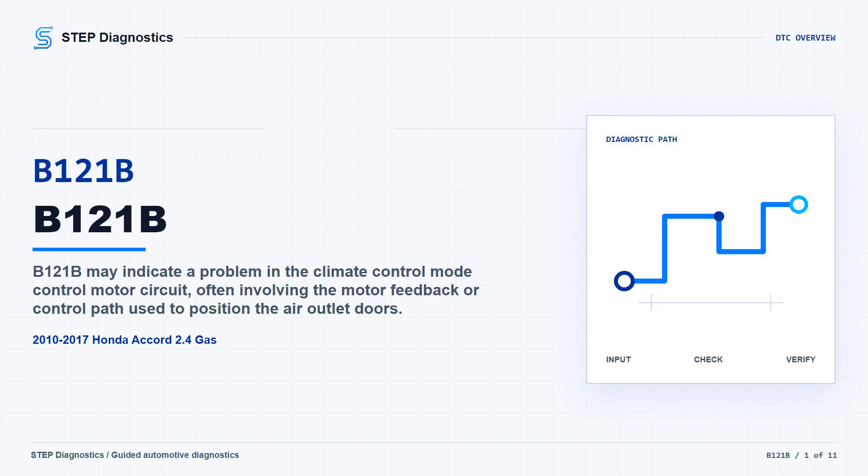On this accord, B121B points to a short in the mode control motor circuit for the climate control system. In plain terms, the control unit may not be able to trust or drive the door position feedback correctly, so the air outlet mode can act up, move inconsistently, or fail to respond the way the driver expects. The possible fault areas are the mode control motor, the wiring between the motor and the climate control unit, connector condition, or the climate control unit itself.

If other short circuit codes are present at the same time, check what they mean first, because the shared 5V circuit may have an open or a short to body ground.

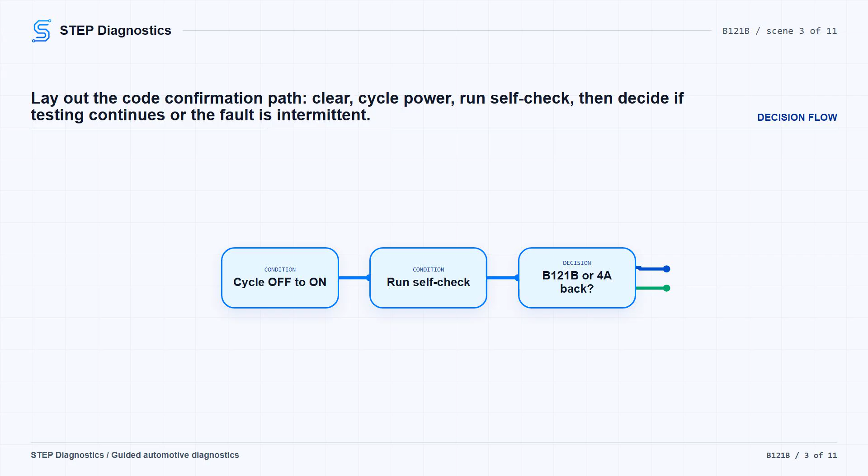Start by confirming the fault. Clear the codes with the HDS. Turn the ignition switch to lock 0 and then back to on, Roman 2, or on push-button start vehicles. Select OFF mode and then on mode. Run the self-diagnostic with the HDS or with the climate control unit, then check for codes again. If B121B or 4A comes right back, continue into the circuit checks. If it does not return, treat it as an intermittent failure and inspect for loose wires or poor connections in the mode control motor circuit.

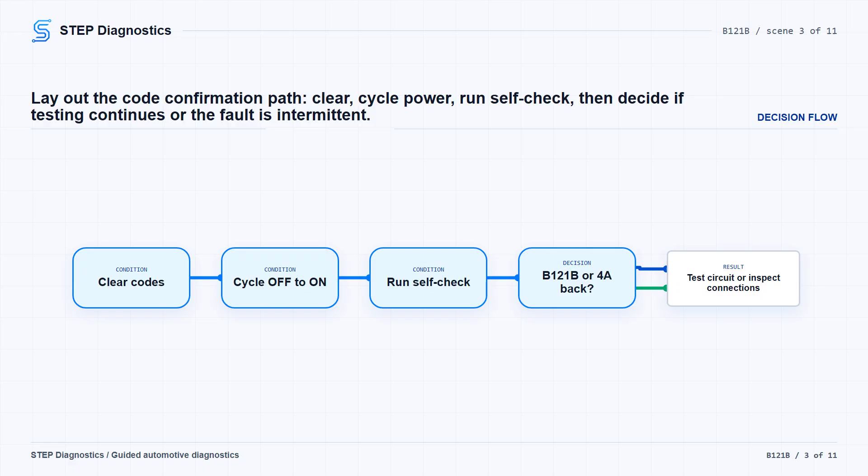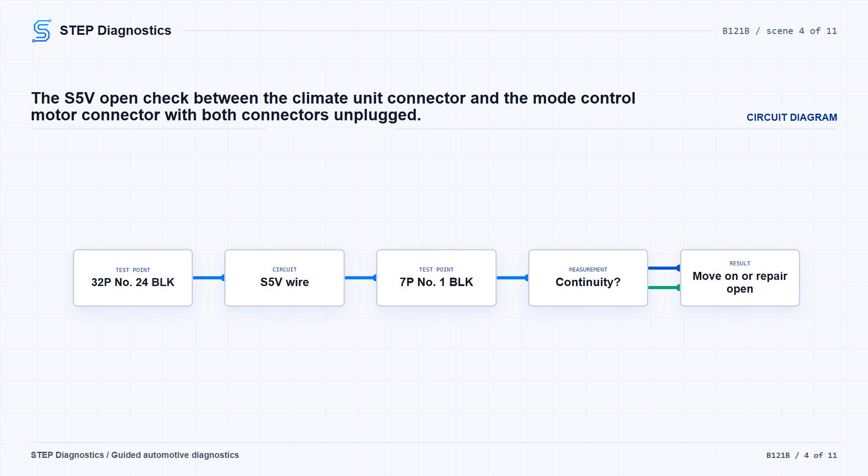With the ignition in lock 0 or OFF mode, disconnect the climate control unit 32P connector and the mode control motor 7P connector. Check continuity on the S5V wire between climate control unit 32P connector No. 24, the BLK wire, and mode control motor 7P connector No. 1, also the BLK wire. If there is continuity, that wire is not open and you move on. If there is no continuity, repair the open between the climate control unit and the mode control motor.

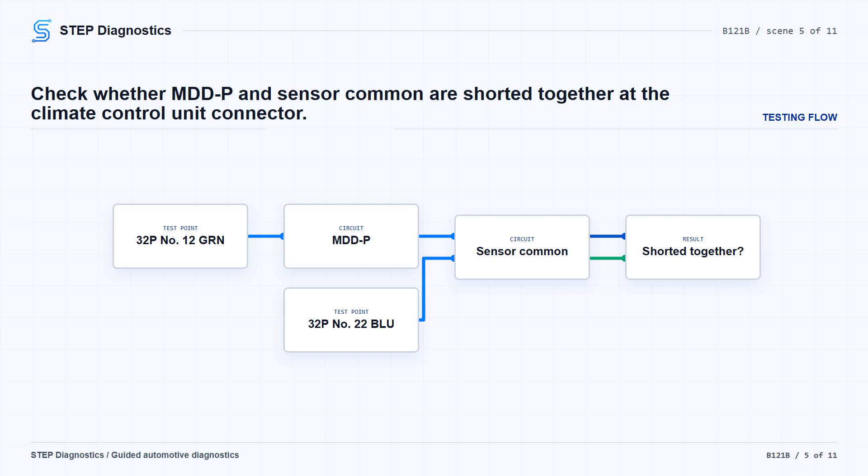Next, keep the same connectors disconnected and stay in lock 0 or OFF mode. Check continuity between the MDD-P circuit and the sensor COM circuit at the climate control unit connector, No. 12, the GRN wire, to No. 22, the BLU wire. If you have continuity here, repair the short in the wiring between the climate control unit and the mode control motor. If there is no continuity, those two circuits are not shorted together, so continue.

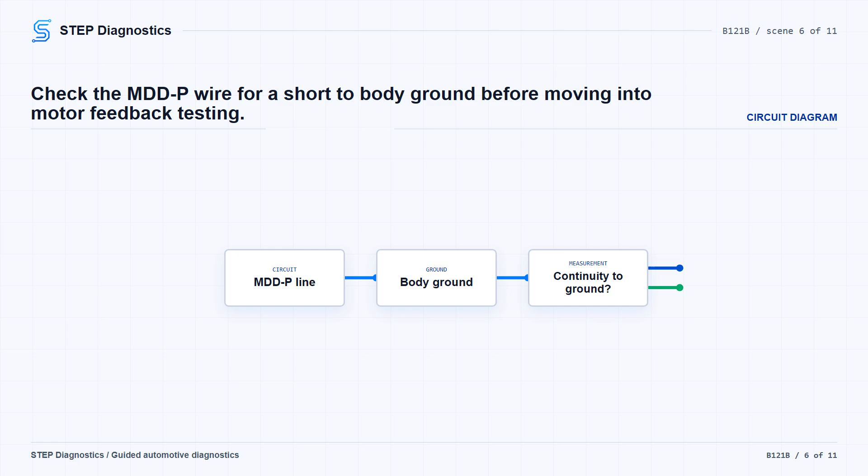Now check the MDD-P line for a short to body ground. With the climate control unit 32P connector and mode control motor 7P connector still disconnected, check continuity from climate control unit 32P connector No. 12, the GRN wire, to body ground. If there is continuity, repair the short to body ground between the climate control unit and the mode control motor.

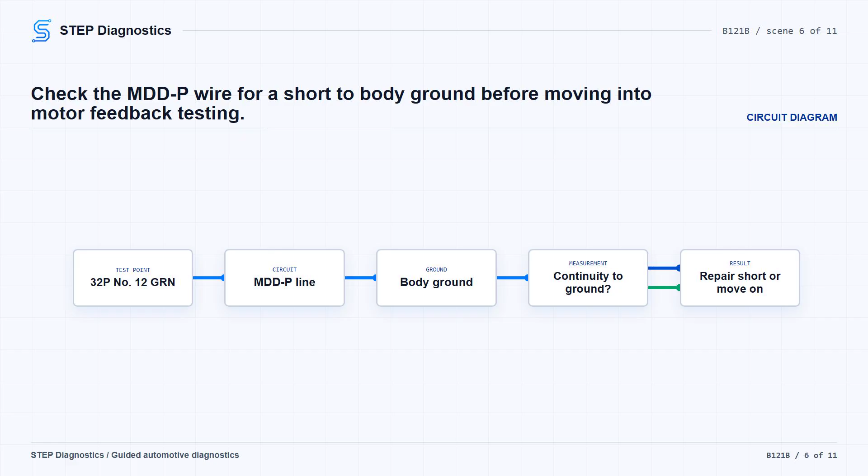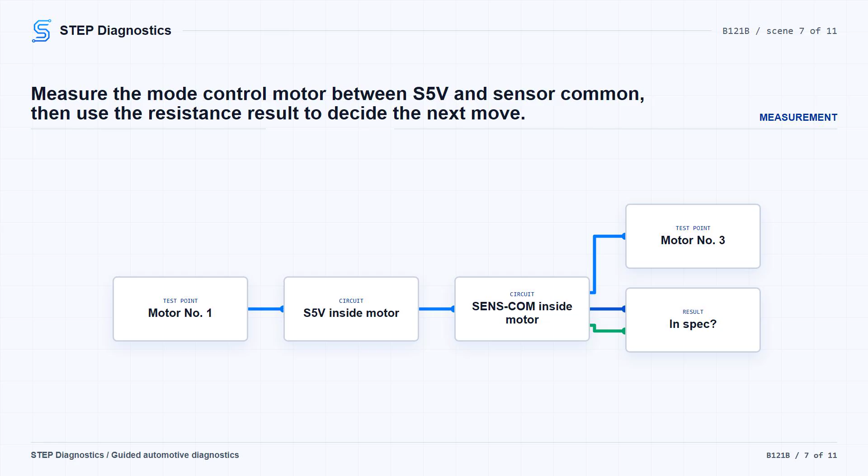If there is no continuity, the MDD-P line passes this part of the test, and the next checks focus on the motor feedback circuit. With the connectors still disconnected and the ignition still in lock 0 or OFF mode, measure resistance at the mode control motor between No. 1 and No. 3. This checks S5V to SENS-COM inside the motor. The expected value is 0.6K ohm plus or minus 1.8K ohm. If the resistance is within that spec, go to the next motor sweep check. If it is not, replace the mode control motor.

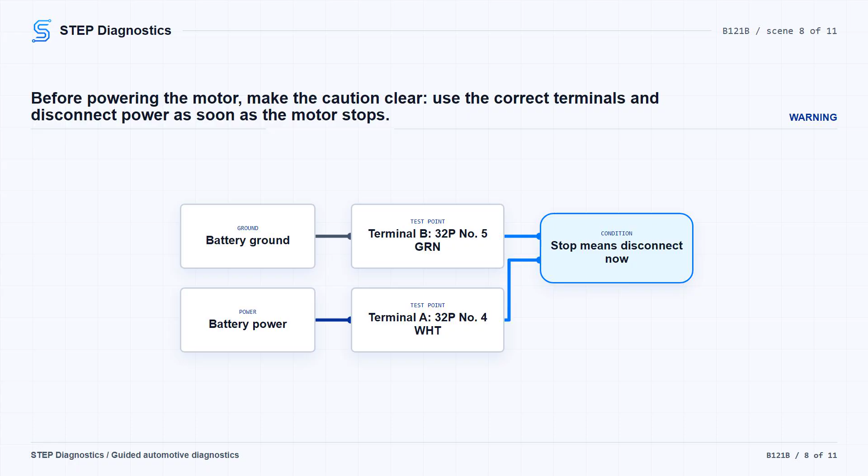For the last test, reconnect the mode control motor 7P connector and leave the climate control unit 32P connector disconnected. Apply battery power and ground to the motor control terminals, then reverse the connections. Terminal A is climate control unit 32P connector No. 4, the WHT wire, and terminal B is No. 5, the GRN wire. Be careful here. Incorrectly applying power and ground to the motor will damage it, and when the motor stops running, disconnect battery power immediately.

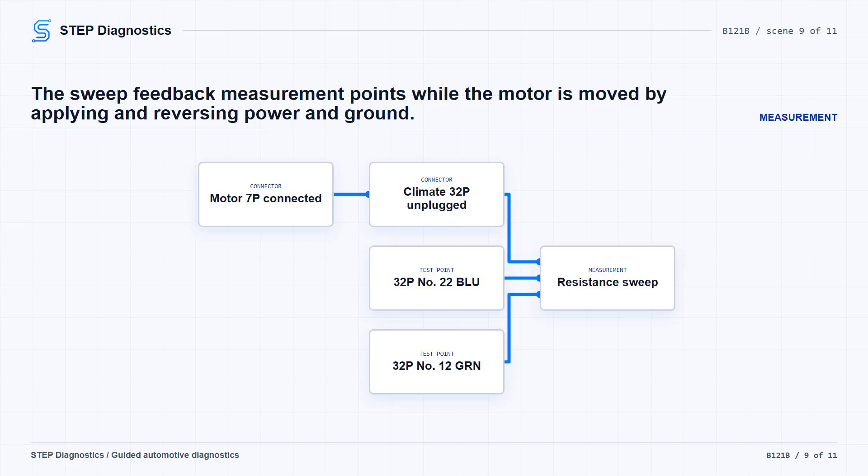While moving the motor, measure resistance between climate control unit 32P connector No. 12, the GRN wire, and No. 22, the BLU wire. Resistance should change between about 0.6K ohm plus or minus 1.8K ohm. Also remember that continuity between MDD-P and sensor COM may disappear when the motor reaches the stop, and the climate control unit usually does not drive the motor to the stop.

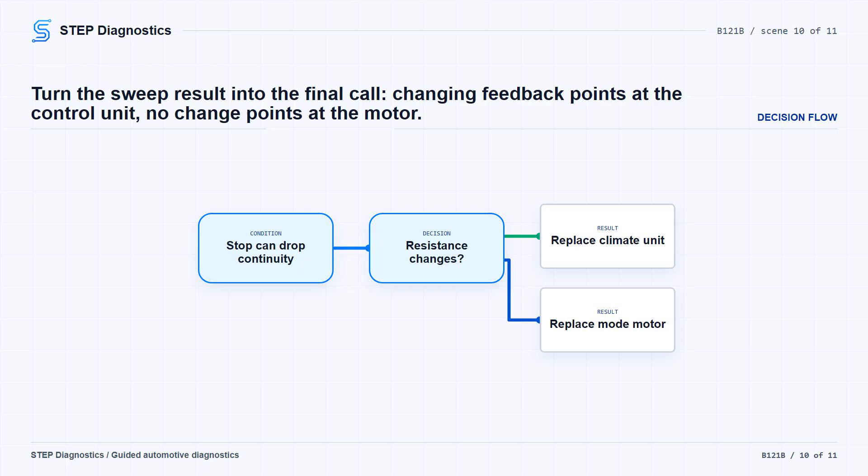If the resistance changes through that range, replace the climate control unit. If it does not change through that range, replace the mode control motor.

Keep verification separate from the testing. After the wiring repair or supported part replacement is complete, clear the codes again. Cycle the ignition or start-stop mode OFF and back on. Run the self-diagnostic and confirm B121B stays gone.

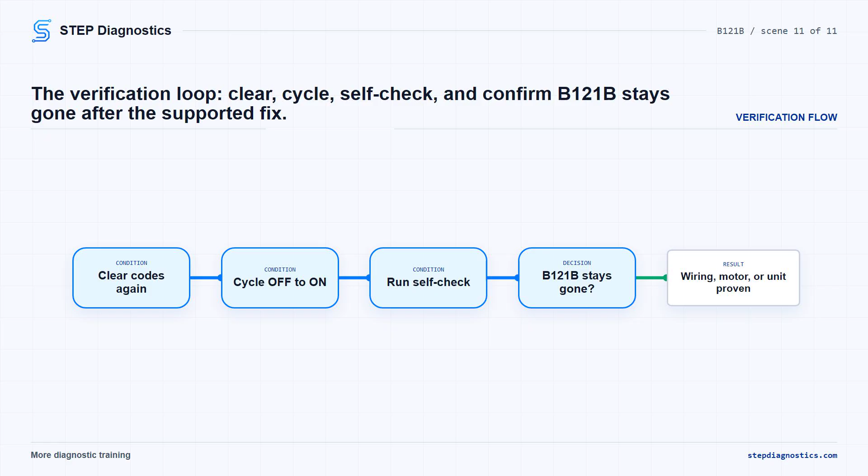The takeaway is simple: prove the code is current, check the feed and signal wiring in order, then use the motor resistance and sweep feedback to decide whether the fault is in the motor circuit, the motor, or the climate control unit.